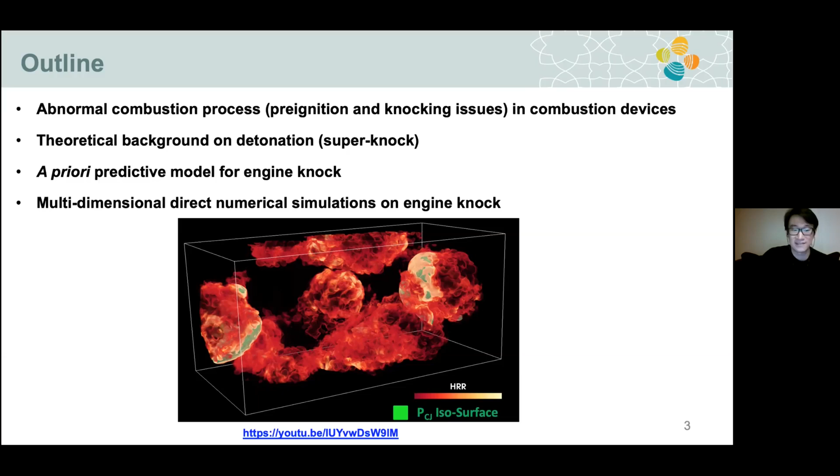For those who are not familiar with some terminology, here are some key terminologies I refer to. First is the ignition delay time. When you burn a fresh gas that is not yet burning, it will auto-ignite, and after a duration, people refer to it as the ignition delay time, from starting to the peak of the heat release rate. This is referred to as ignition delay time.

There is a very short period where the most of the heat release occurs, from 5% of maximum heat release to the peak. This is referred to as excitation time.

In combustion, normally if the process is dominated by deflagrations, it is a flame-like front, low speed, as you can see here - it is called deflagration. However, when you have spontaneous autoignition, it's like a volumetric ignition. You will have a very rapid heat release rate, with the peak much higher than the case with slow-speed deflagration. We call the blue curve deflagration, and the red is for spontaneous ignition.

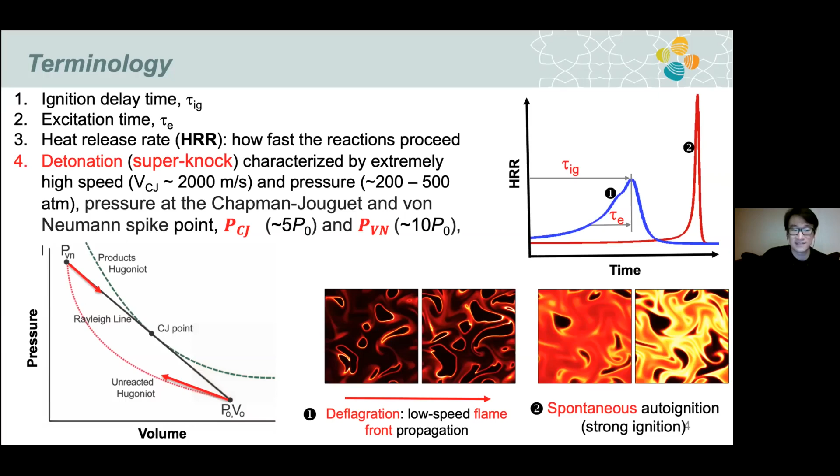So let's get started with the introduction of the combustion process in the combustion device. First, let's get started with the internal combustion engines.

Downsized and boosted internal combustion engines can provide high thermal efficiency and low emissions. However, at high load conditions, the engines are more prone to pre-ignition, knock, and super-knock - it also refers to detonation. You can see from the animation here, we have a very early phase of deflagration at slow speed, and then it evolves into the detonation front.

In this animation, you can see clearly the iso-contour of the pressure at the CJ state, around 200 bar, and when it takes place, it will consume the rest of the mixture instantly. In this simulation, I slow down this process so you can see clearly. Whenever the super-knock occurs, you can see it will induce a very high amplitude pressure wave, and because of this high pressure wave, a few hundred bar, it can damage combustion components like this one.

And there are other cycles - normally it's just end-gas autoignition, which just generates a knocking, and normally this is not as dangerous as a super-knock event.

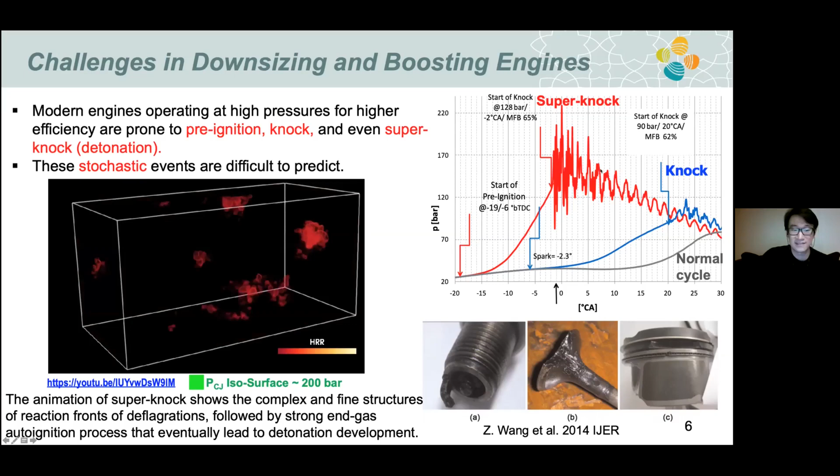The pre-ignition and super-knock is not only occurring in internal combustion engines, it also occurs in the RCM. In this very interesting study, the author tried to investigate how pre-ignition can induce detonation. What they do is try to initiate a pre-ignition by an ignition source, and it evolves into a flame, and heats up the mixture.

Deflagration, you can see the process from left to right. The deflagration evolves, and when the mixture is burned and propagates, it sends an acoustic wave to the whole chamber. Finally, when the mixture is ripe for autoignition, it evolves from autoignition to detonation. We can see here they capture the process from autoignition to detonation, consuming the rest of the mixture. When it occurs, you can see a very high spike in the pressure rise rate.

Another phenomenon people also observe in the shock tube - they observe different combustion phenomena. Normally, ideally, in the shock tube, they try to monitor the ignition delay time, like you see in the solid line here. So what they want is the ignition should be homogeneous. You can see in the first row here, everything is burned simultaneously.

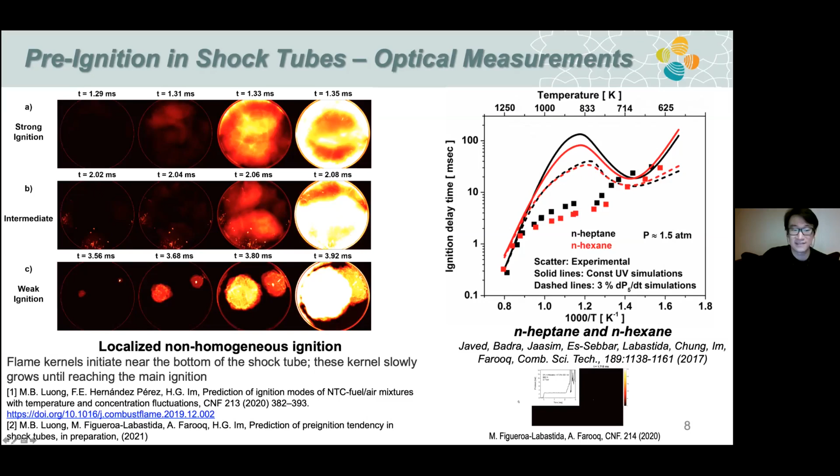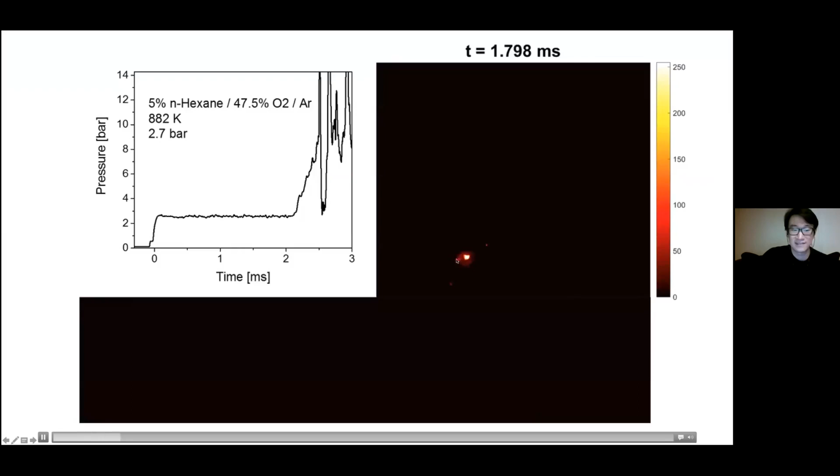Here's just the animation from the figure I showed you. You have a very early pre-ignition, developing into flame, then compressing the mixture, and finally auto-ignition. Sometimes end gas, if the mixture is so reactive, can develop into detonation as well.

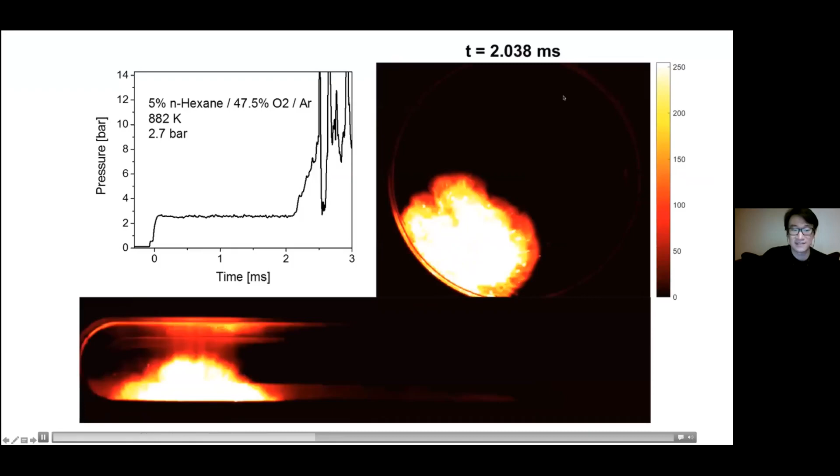Detonation is also studied in a closed chamber with very high turbulent intensity. This work was published recently by this group. What they try to do is initiate a flame with very high turbulent intensity on the left hand side, and on the right hand side is a closed chamber. You can see for this mixture it's not so highly reactive. After two reflections at the end wall, the detonation will evolve from the end wall and develop into detonation. In this case, they use a hydrogen-air mixture.

In another scenario, they try to increase the oxygen concentration, meaning the mixture becomes more reactive, and we don't need two shockwave reflections at the end wall like this case. In this case, it develops immediately on the way it reaches, before it reaches the end wall. Because when the mixture is so reactive, it's very prone to go to detonation.

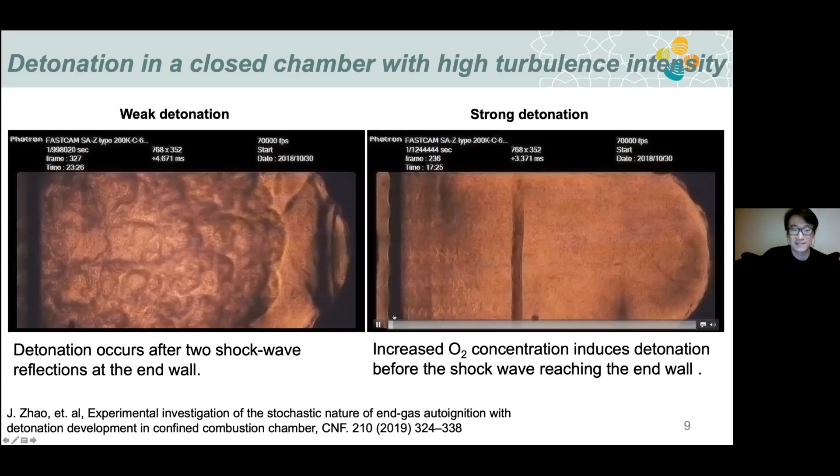We also put our effort into simulating the super-knock under IC engine conditions. Here's the animation from our recent study. It shows that the process goes from deflagration, and when the mixture is so reactive, like at very high temperature, we try to simulate end gas autoignition, and it can also develop into detonation. But it requires a running distance long enough - if it's short, it's just autoignition.

If we take some snapshots from 2D or 3D, we can see that the structure of the detonation is quite complex. In this context, you can see the complex interplay between the autoignition front here, and there are some interactions that will induce some detonation waves here.

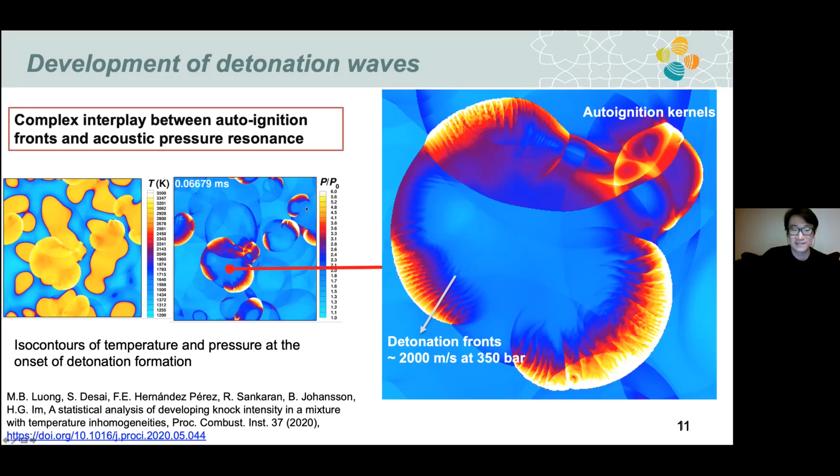In this context of multi-dimensional analysis, we try to formulate a predictive model to predict this phenomenon. Here's the motivation of our work: first, develop a model to try to predict super-knock and knock intensity for multi-D problems. We will use 2D and 3D direct numerical simulation, and analyze the data to validate the prediction. In this case, we will use ethanol for this study.

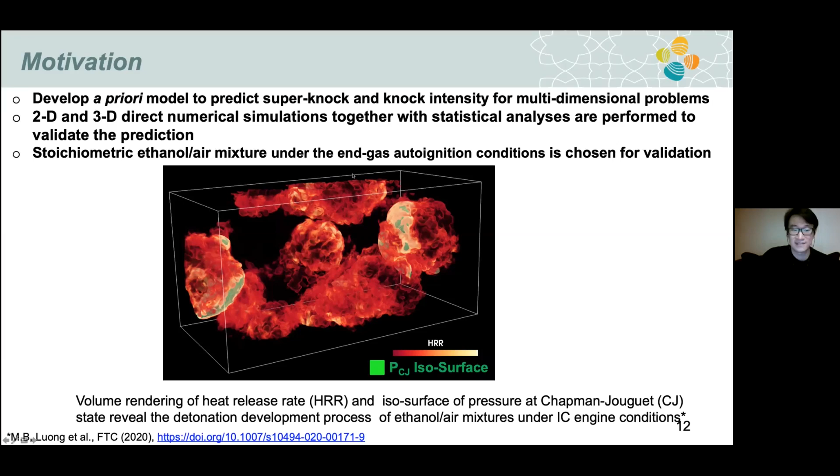At the end of my presentation, I will also show some cases with DME. There are some cool flame phenomena, and I will talk about that one by one. First, let's go through the theoretical background on engine knock.

Normally, it refers to the autoignition of reactant mixture with some level of inhomogeneity. Here we just pick up only the temperature inhomogeneity, but in the engine you can have composition inhomogeneities as well. The leading work is by Zeldovich, very early in the 1970s.

Also based on his work and other people's work, Bradley already built an ignition regime diagram, as we can see here. But this one is a one-dimensional regime diagram.

What it means is, normally to build this ignition regime diagram, we have a linear temperature profile with a certain level of slope, and we compute two non-dimensional parameters, xi and epsilon, computed at the middle of the hotspot. When these two parameters fall within this regime, bounded by the upper xi and lower xi with a certain level of specific epsilon value...

...we will have a detonation development regime. If we go to the upper branch, it will be deflagration dominant, or if we go to the left here, it can also be a very small hotspot that cannot bring the system to detonation.

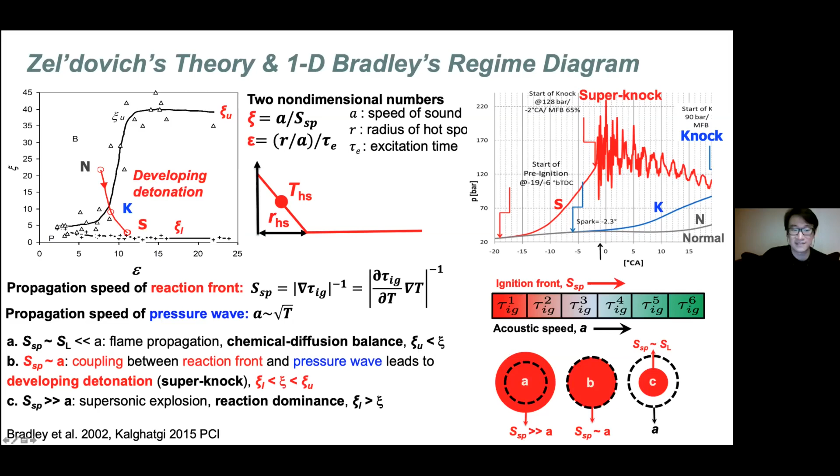To summarize, we need two parameters, xi and epsilon, and within this regime we will have detonation development. So I will demonstrate this with some 1D animation.

For this case, I have a very small hotspot. You can expect that detonation will not develop for this case. You can see the hotspot evolves into the flame, and the rest of the mixture is consumed first by deflagration, and when the mixture becomes reactive here, it reaches the ignition point and auto-ignites, and there is no coupling.

You can see the level here, the pressure is at around 100 bar, and this is at equilibrium pressure.

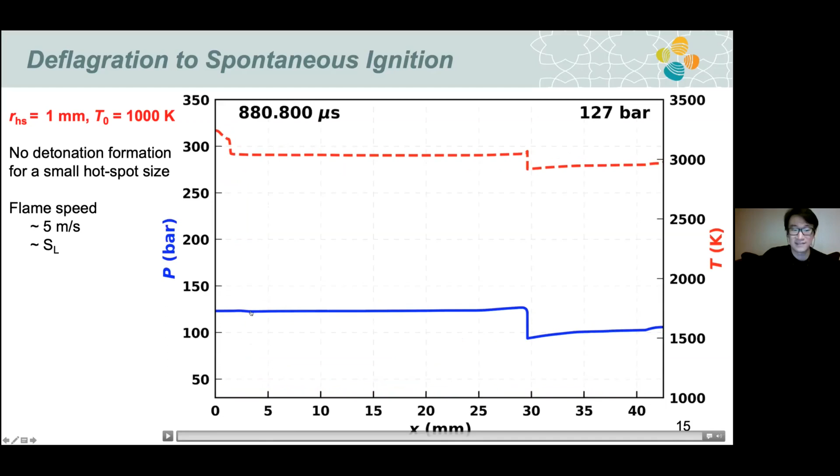However, in this case, I try to increase the hotspot size to become bigger - around 5 millimeters. You can see that detonation can evolve immediately. There is perfect coupling between the ignition front and the pressure wave.

You can see here, in slow motion, the detonation front immediately where the pressure is around 350 bar, and it just consumes the rest of the mixture.

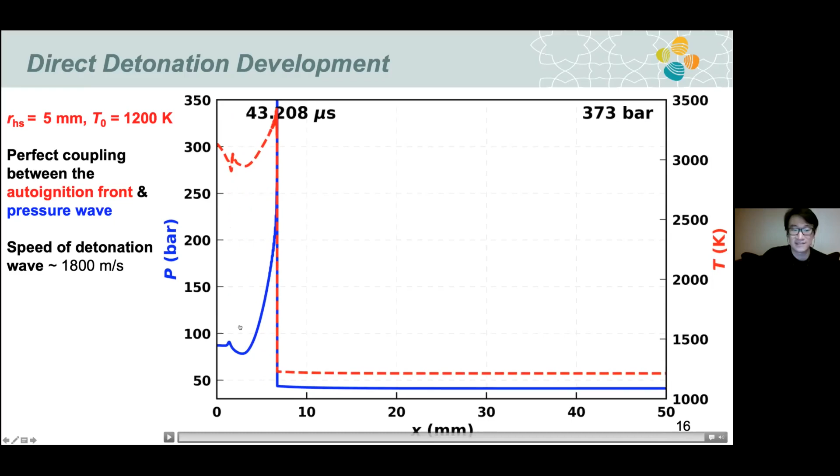So this refers to direct detonation development, if you have the right gradient level and a big hotspot size. The last scenario is deflagration to detonation transition.

First, similar to the previous case, we also have a slope of the temperature gradient. In this case, I just reduce the mean temperature from 1200 K like before to 1000 Kelvin. So the ignition process will go through two processes.

First, it auto-ignites, but it decouples. You can see the pressure wave here leaving the ignition front, and here is a flame. You can see there is no coupling.

However, after a few times of reflection, the deflagrations keep propagating to the right, and the mixture becomes more reactive because of the heating from the flame, and also the ignition delay becomes shorter and shorter. Finally, you can see at this moment the detonation front start to establish, and it will consume the rest of the mixture. The maximum pressure can reach a few hundred, more than 400 bar, and it just consumes the rest of the mixture. So this is referred to as deflagration to detonation transition.

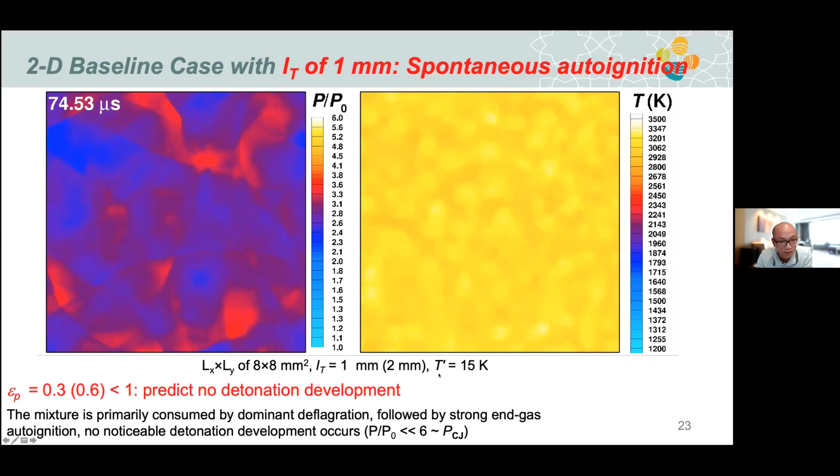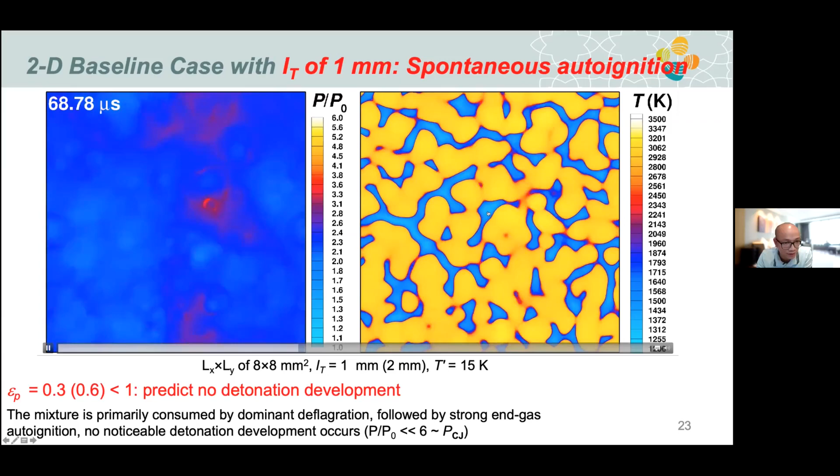It's close to the equilibrium pressure of the mixture. So we test for two cases, the length scale from 1 to 2, and we confirm that there is no detonation development for this case. We also try to vary the T prime for these two length scales, from 20 to 2, and we don't observe any case of detonation development. It means this mixture has a length scale running distance that is very small. It cannot support detonation to develop. You can see when the auto-ignition happens, most of the mixture is already consumed.

However, in this other scenario, we try to increase the length scale from 1 to 5. In this case, we estimate the epsilon p equal to 1.4. It means it's greater than 1. We expect that the mixture will go for detonation. By doing some analysis, we know that at this condition, the level of temperature fluctuation can bring a suitable xi parameter for the mixture to go to detonation as well.

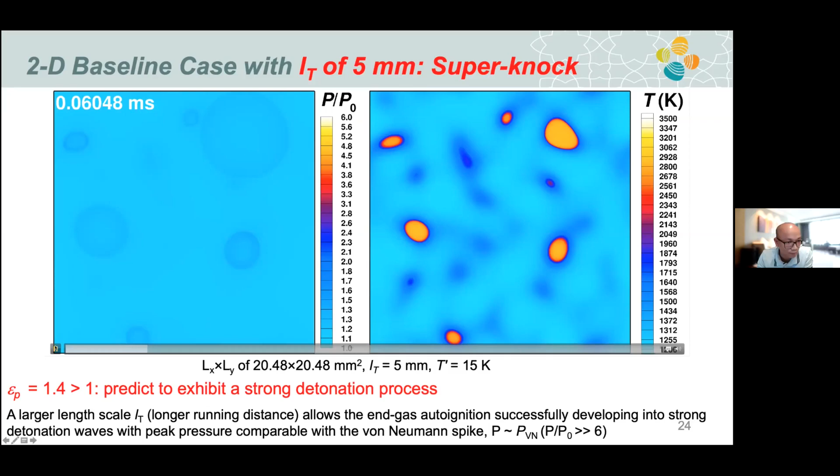So you can see there first the mixture will auto-ignite and evolve into deflagration. It sends out some acoustic wave generation. And then you can see there are two auto-ignition kernels interacting. It evolves into some detonation front. And when it becomes a stable detonation front, it will consume the rest of the mixture quickly.

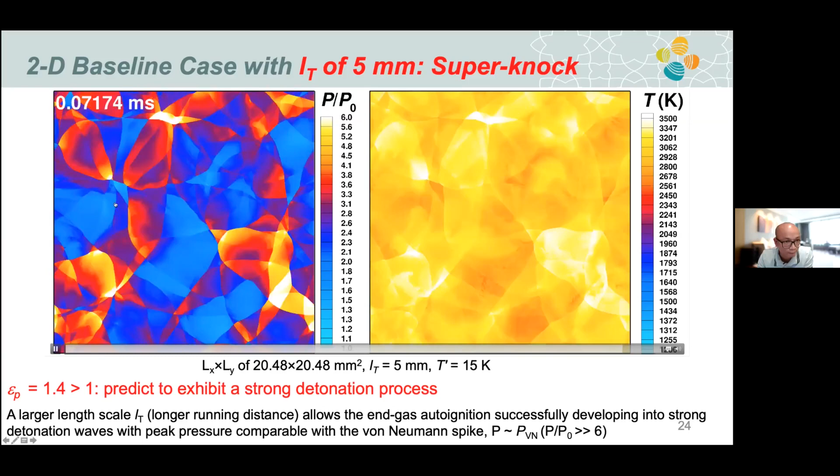In simulation, I just slow down the process so you can see it better. Let's watch one more time. You can see deflagration, interaction, and finally we can see the detonation wave propagate and consume the mixture. In this case, when the detonation happens, the peak of the pressure is around 300 to 400 bar.

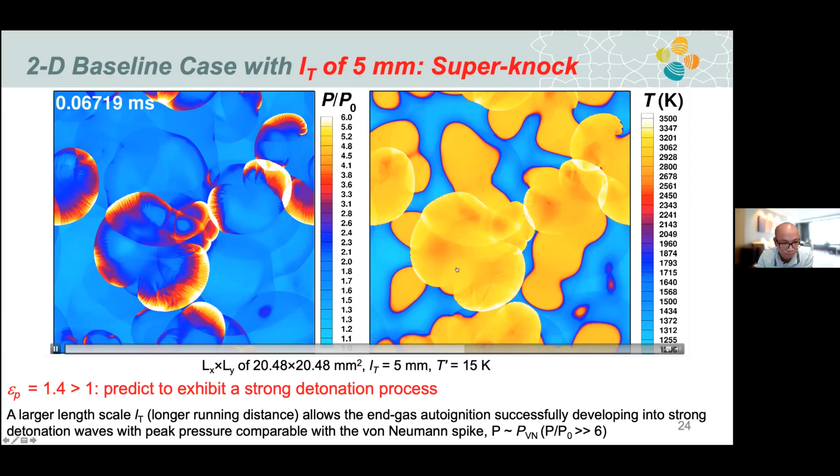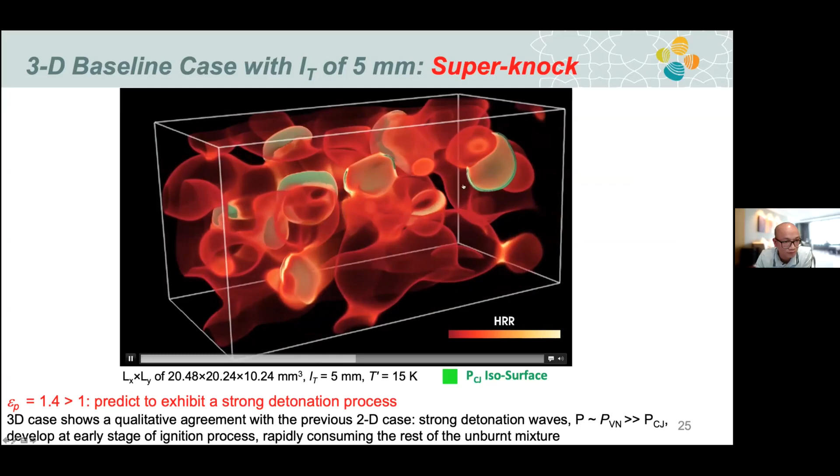We also try to do 3D to compare with 2D, and a similar observation is also observed for the case with length scale equal to 5 millimeter. The comparison between 3D and 2D qualitatively gives the same expectations, showing a strong detonation process. You can see there is wave interaction, and it forms the detonation front. The green isosurface here is the CJ state, and it evolves into detonation.

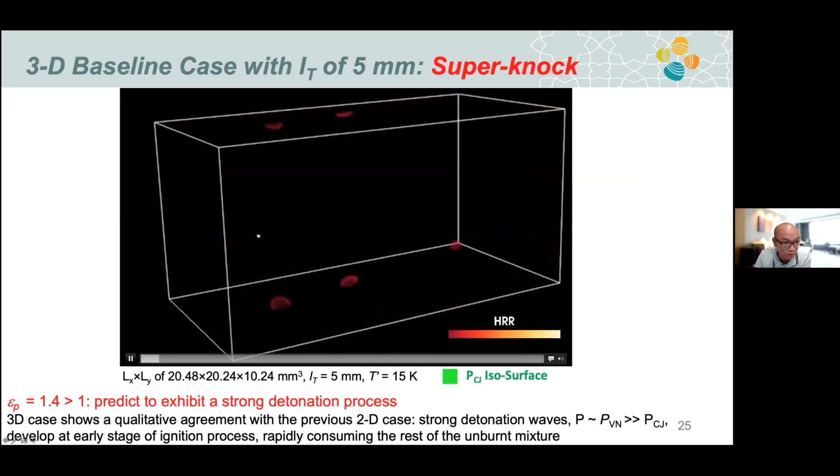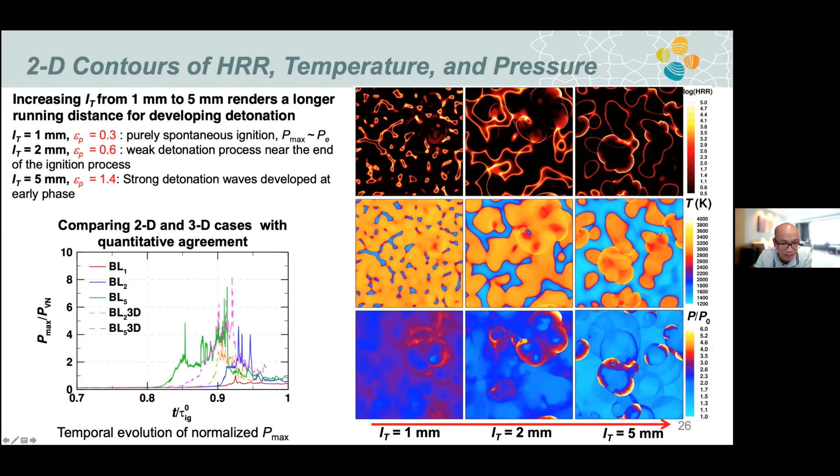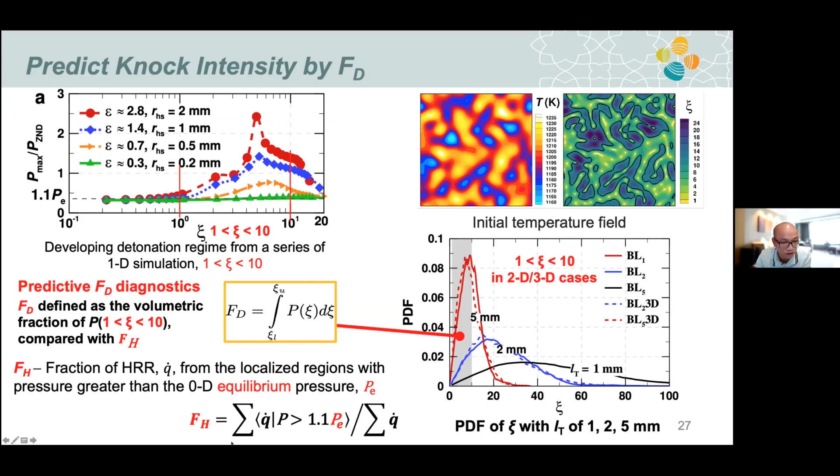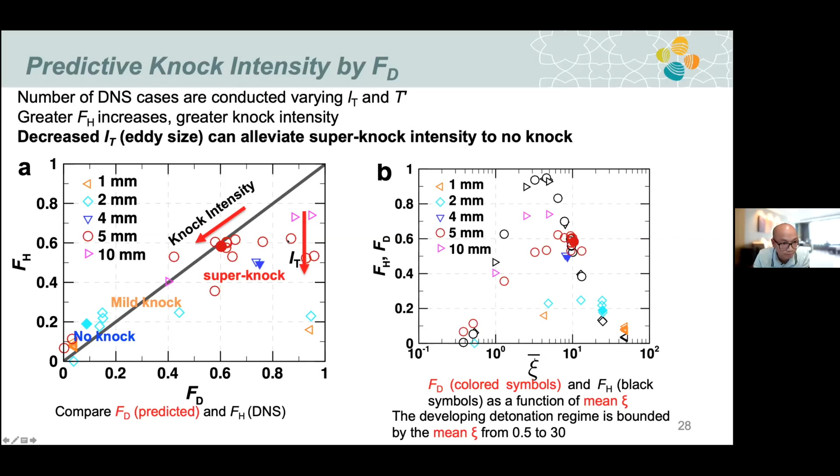So when we investigate the effect of turbulence, we try to learn from that. We keep the length scale of the temperature here at 5 millimeters, where without turbulence we will have very strong detonation. We will impose very high turbulence intensity, but with a very small length scale. So the idea here is we have a very large length scale of temperature.

We stir and try to use the turbulence to make the eddy size become smaller and smaller. When the eddy size becomes smaller, the temperature field will be smaller, and it will reduce the detonation development. Of course, when we consider turbulence, we also need to consider its time scale, how fast the eddy can move to homogenize the mixture. So here we have a length scale ratio between the ignition delay time and the turbulence time scale of around 5, meaning the turbulence will move 5 times faster than the ignition delay time.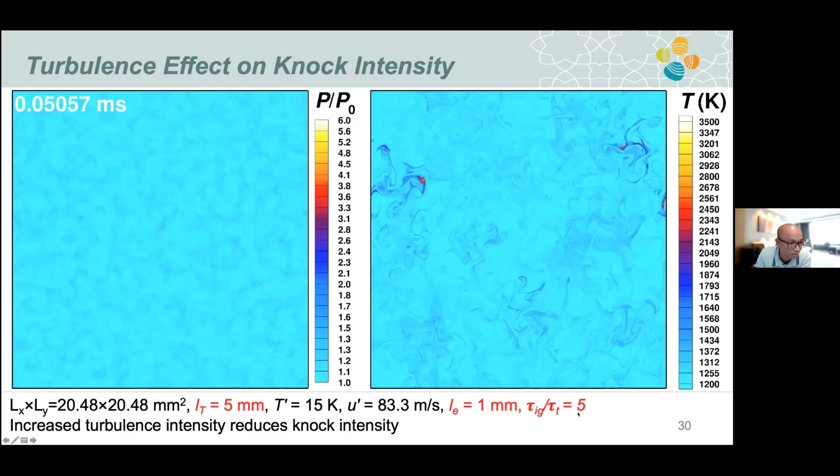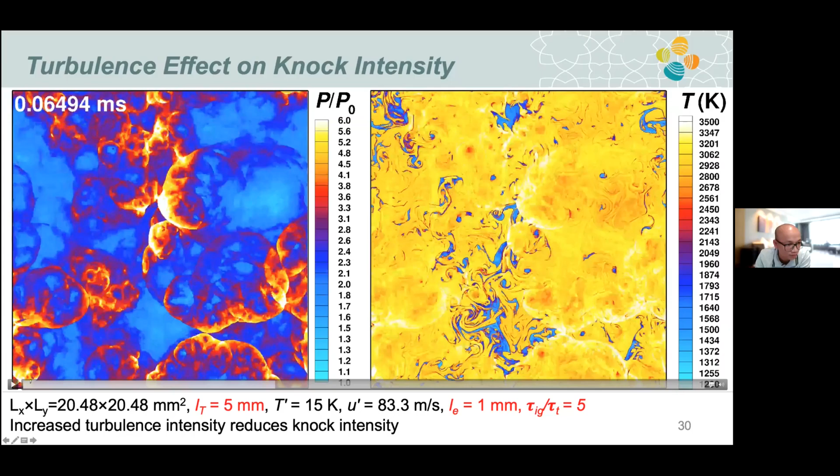You can see from this animation, for this case without turbulence, it will feature very strong detonation. However, when we impose this level of turbulence, you can see the mixture breaks down. Most of the mixture will be consumed by deflagration. There is some coloration showing autoignition, a kind of breakdown detonation. Detonation occurs locally, and there is no coherent structure. It just occurs locally because there is no remaining mixture, as most of the mixture is consumed by deflagration.

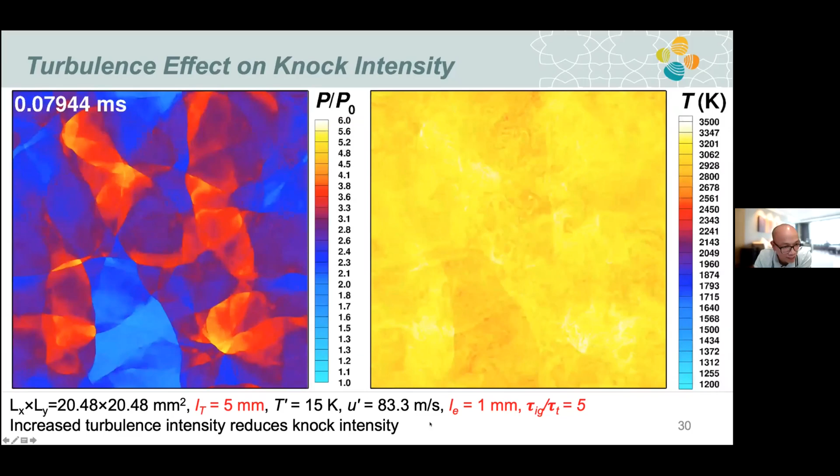There is some end gas autoignition developing toward detonation, but not reaching the detonation level, because we impose very high turbulent intensity with small length scale. We also validate this by running 3D simulations with high turbulent intensity. You can see at the early phase, a very strong mode of the mixture will be consumed by deflagration.

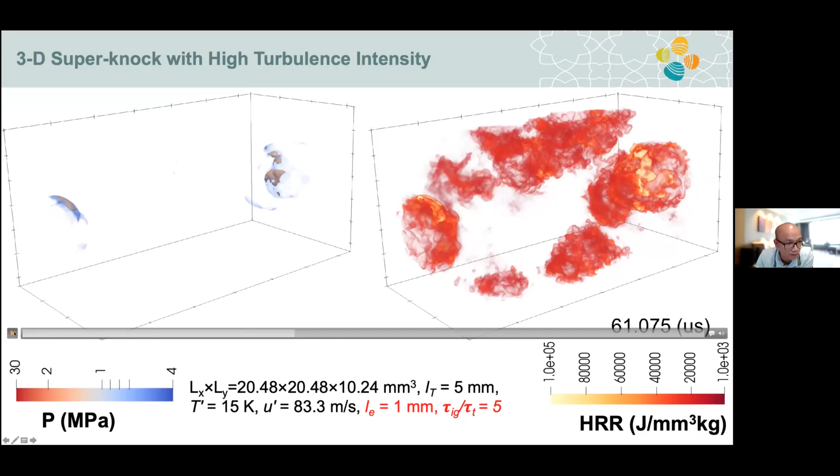You can see most of the mixture here is consumed by deflagration, and when it evolves, some autoignition kernels start to establish. Because of turbulence, it will break down the detonation front. It's on the way to develop into detonation, but turbulence will break down the structure and make the process slow down. Finally, we can see at the end there is some end gas autoignition evolved into detonation, but it's very weak compared with the case without turbulence.

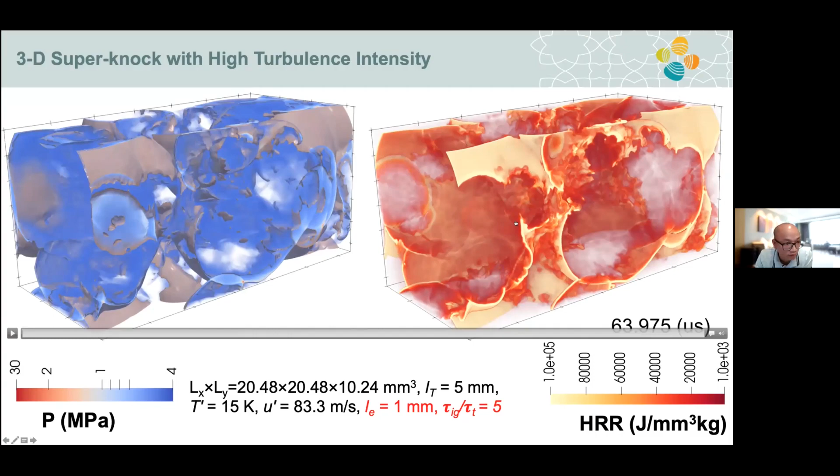In this study, we use high temperature, so the mixture is very reactive, and it can easily go to detonation. However, if we reduce the reactivity of the mixture by decreasing the mean temperature to 1000 Kelvin or 800 Kelvin, which is normal in engine conditions, there is no detonation development. So reactivity of the mixture is a key parameter.

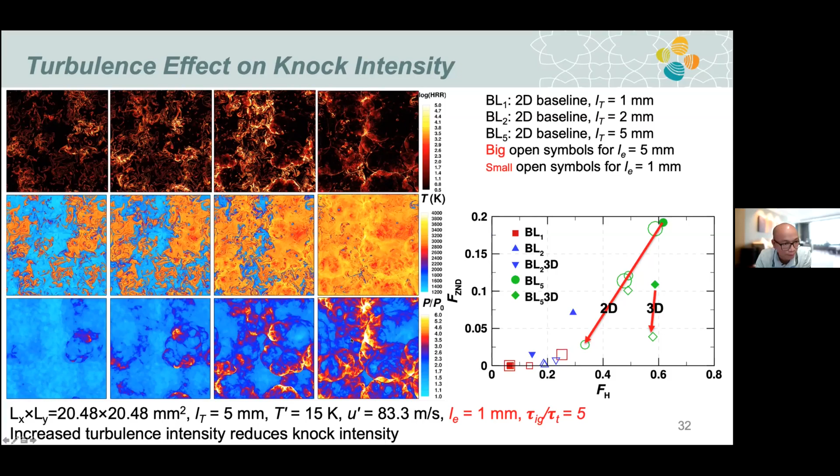So the last question: we learned from previous that length scale is a key parameter. Can turbulence promote knock intensity? In this case we will change from a very small eddy size of the temperature field, 1 millimeter, and increase the turbulent length scale up to 5. When we increase the turbulent length scale from 1 to 5, the eddy size of turbulence will be bigger and bigger, scattering the temperature field to a longer running distance, which may allow for longer running distance for detonation development.

We can see here when we have high turbulent intensity with big length scale, it can promote knock intensity. This is the case with no turbulent intensity or small length scale, and there is no detonation happening here. However, when we have high turbulent intensity with big length scale, big eddy size, we can promote the detonation development.

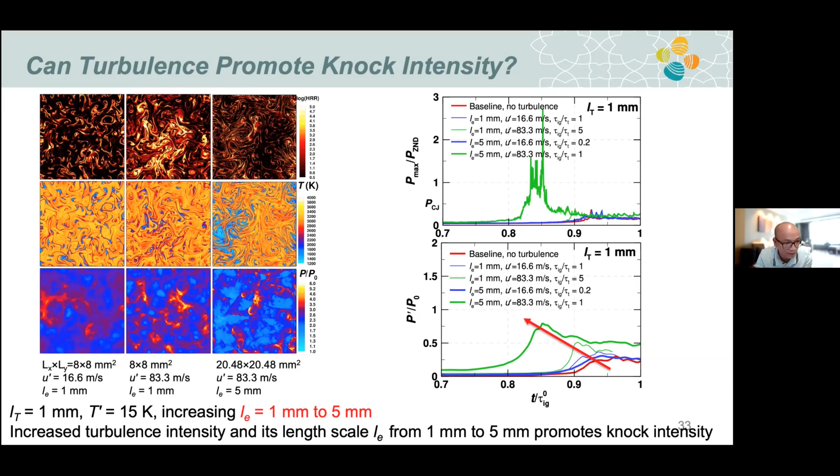So the key idea here is mainly the length scale of the temperature field. It translates to the length scale of the ignition delay field, which translates to the ξ parameter. If the length scale is long enough to support the detonation running distance, it will favor detonation development if the mixture is highly reactive.

The last point here is we try to do a correlation between FH, where the mixture is burned above the level of detonation, and the fraction where the mixture is burned beyond the CJ level or ZND level. Let's look at the CJ level here, the correlation between FH, from DNS, above the equilibrium one, and here is where the mixture is burned above CJ level.

So you can see if the remaining mixture is still abundant where an autoignition happens, it's very dangerous, bringing the mixture to detonation. However, if most of the mixture is already burned, there is no remaining unburned mixture to support detonation.

And here is just the case without turbulence and the case with turbulence, and it's consistent between the two. I'm not going into detail here. I just repeat the key parameter: when we increase the length scale with a proper level of fluctuation, we can have a very high level of detonation, strong detonation.

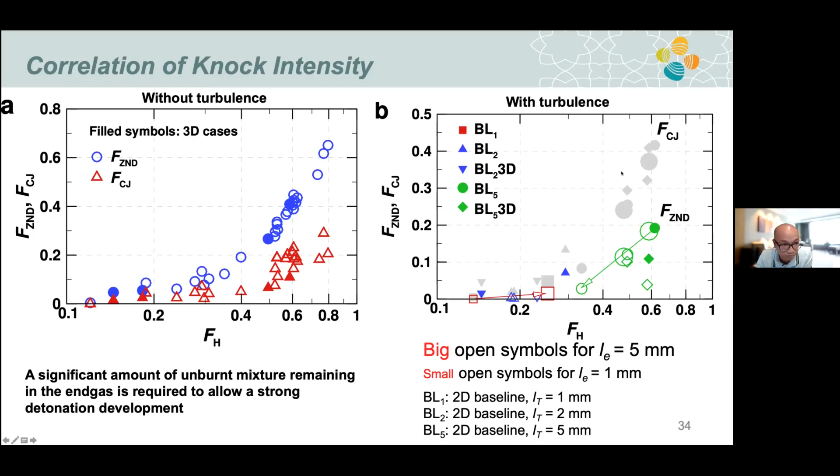This is the last part of my presentation, some work in progress we're trying to publish this year. The first one is we apply machine learning to predict knock.

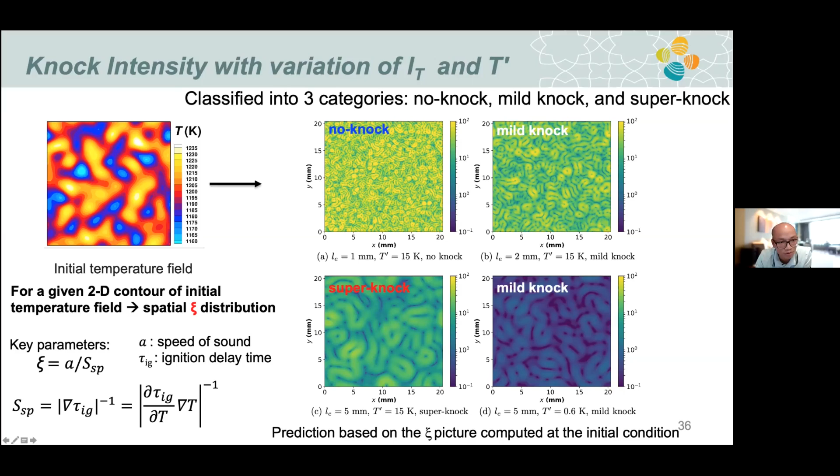For any given initial condition, the model can predict whether or not it will go to detonation. For this prediction, we use a VGG16 model, which is a deep convolutional neural network. This model allows us to extract features from the image and relate them to the event.

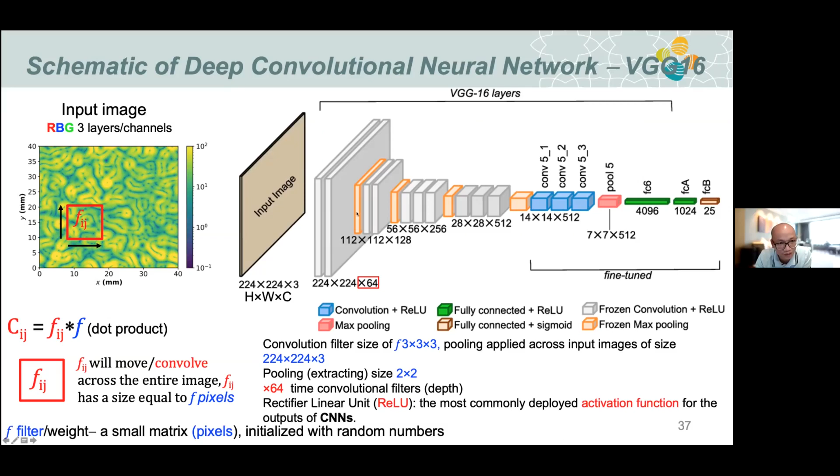We characterize the mixture into three different categories: no knock, mild knock, and super knock. By using all of the initial conditions we have, we train the model and try to predict the outcome. Here is the overall picture.

As I mentioned, we try to vary T prime from 0.5 to 20, and the length scale of the eddy size from 1 to above 5, because this is the data we have. The machine learning model provides the prediction quite well, as you can see.

Let's look at the contour for the blue regime here. It corresponds with no detonation development. Basically, the length scale is from about 1 to approximately 3, which is consistent with the prediction by epsilon p. Above this length scale, with a certain degree of fluctuation, you can see the red dots here correspond with detonation development. So the prediction by machine learning agrees very well with the theoretical framework.

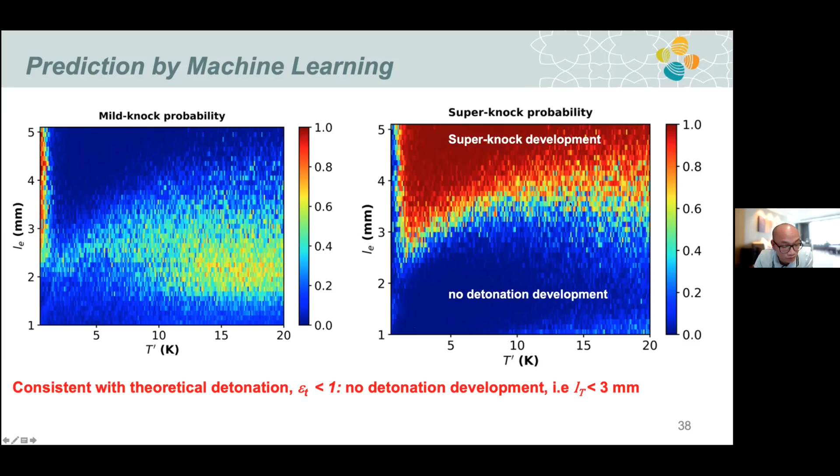The next part of my presentation: before, I just used ethanol. Ethanol has single-stage ignition, with no cool flame. So how about the predictions? Can it work with a cool flame, like DME?

When we work with DME, it has a cool flame. What this means is when you ignite the mixture, before it reaches the main ignition, there is some amount of heat release that occurs. This is referred to as the cool flame. Because of this heat release, there is a certain increase in pressure and temperature.

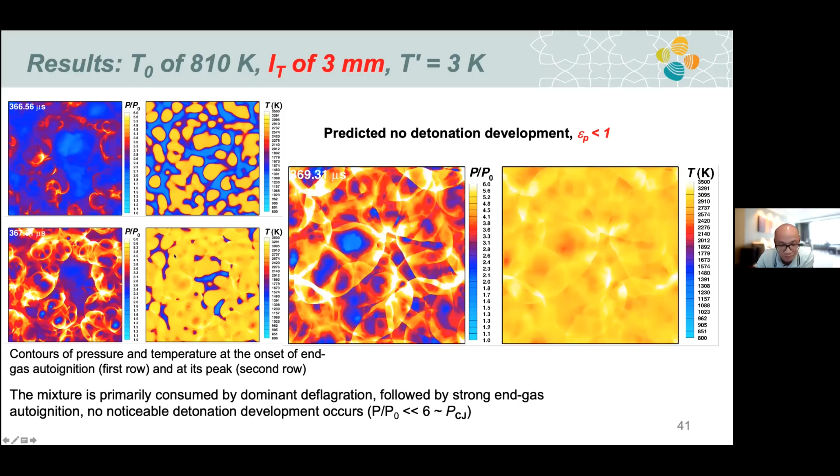So here I just take some snapshots. You can see I take the snapshot at the moment where the detonation starts to occur, and at the end it just consumes the rest of the mixture by detonation.

It seems that the revised model we're working on works very well, because at this condition, if we use the old model, it will predict that no detonation develops. However, when we account for the cool flame, we observe detonation at this condition.

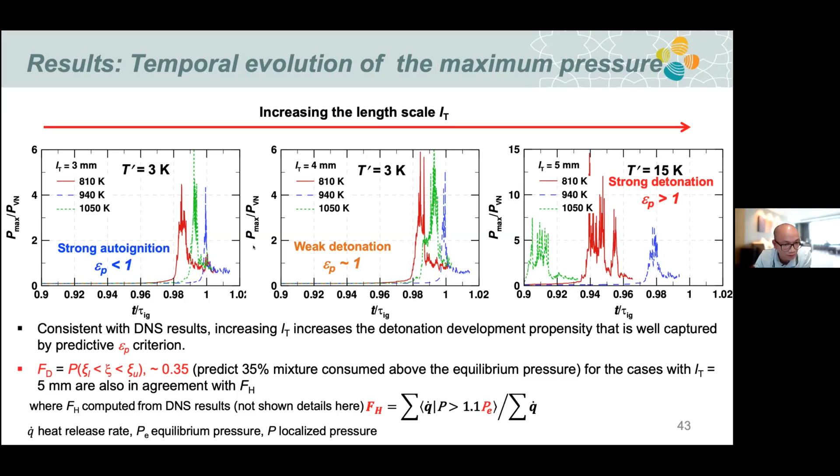I just go through the key message I try to deliver here: without accounting for the cool flame, the prediction by the old model is inaccurate. When we account for cool flame, the running distance for detonation development is much shorter, and this should be taken into account when we compute the critical length scale requirement for detonation development for NTC fuels like DME, heptane, and hexane.

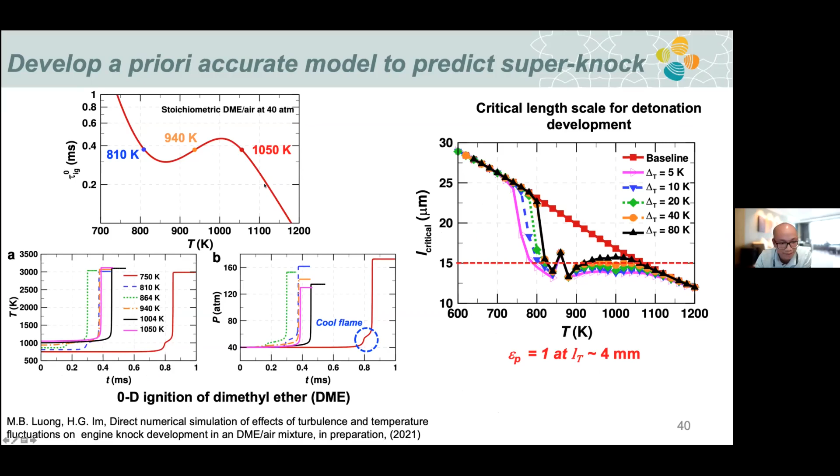If you recall my presentation, the length scale ratio between the temperature field and the turbulent field is a key parameter. Also, how fast turbulence can mix is a time scale ratio between the ignition delay versus the turbulent time scale - these are key parameters. We also establish predictive criterions to predict superknock. If it's greater than 1, with suitable level of fluctuation, we expect detonation development.

And we also propose the fraction FD - the fraction of location where the mode of the mixture is prone to detonation - with the ξ parameter from 1 to 10, it will predict the knock intensity, how much fraction of the mixture will be consumed by detonation. We also try to apply machine learning to predict superknock, and it gives us a good prediction as well.